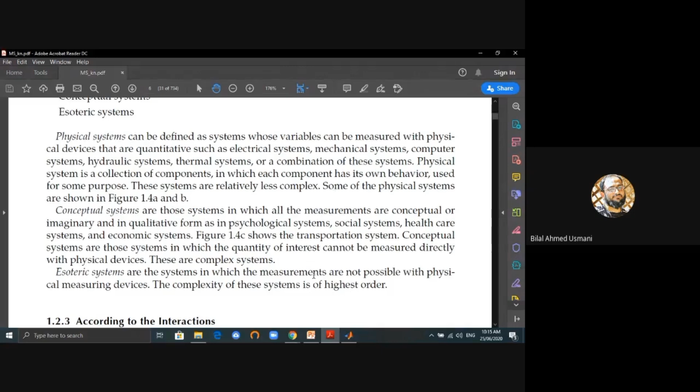So you cannot measure the mental capacity of a person. You cannot measure the thinking perspectives of a person. So these type of systems are generally esoteric, and the measurements are not possible with physical measuring devices. You don't have a perception meter or something like that to measure a person's perception related to, say, use of antibiotics. So we won't be talking about that.

According to the interaction, the systems could be thought of like that. One thing people do a lot nowadays, which is kind of the pinnacle of doing good scientific research, is that your research should be applied. Your research should be applicable to a certain domain area, and we should see the impact of your research. Your research should have the capacity to build capacity among individuals.

Your research should be scalable. Your research should be able to reproduce itself at different conditions, at different initial conditions of the system. So these types of research are quite popular nowadays. Most of HEC's funding, most international fundings, most Wellcome Trust fundings are into research which is more towards application rather than building conceptual or notional areas of science and knowledge.

So esoteric systems are over here. Electrical systems are mostly towards design. Electrical, mechanical, thermal and hydraulic systems are towards design and control. Chemical systems mostly deal with control. Biological systems, socio-economic systems, conceptual systems, psycho-based systems - for all of these, design is the most concrete physical thing, and speculation is the most towards the notional or philosophical thing. So these are the differences between them.

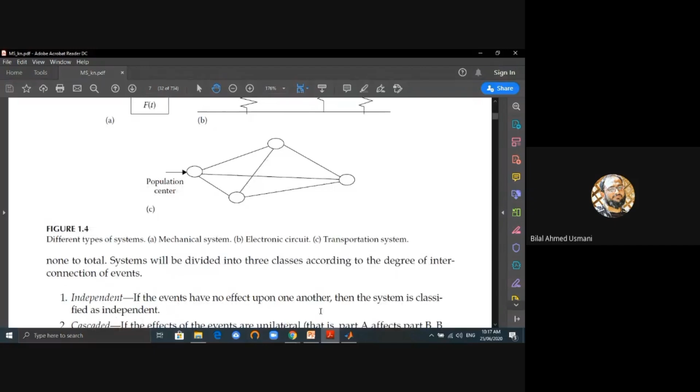Now, these are a couple of examples. This is the example of a mass attached to a spring with a damper, and this is B, an electronic circuit, and C is a transport system. You can have... I won't look into that.

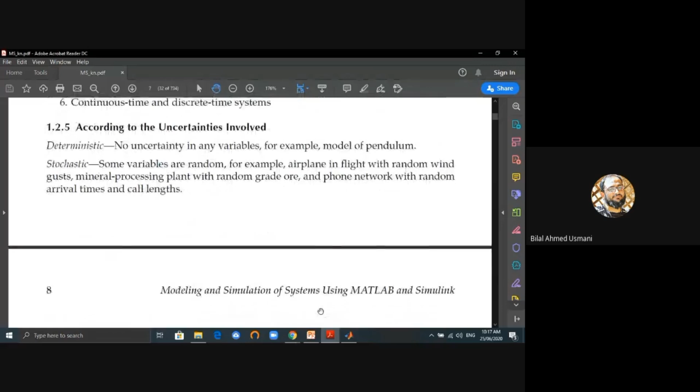We talked quite a lot about deterministic systems. We talked a lot about stochastic systems in the previous lecture. Some of them are fuzzy systems. We won't go into much detail.

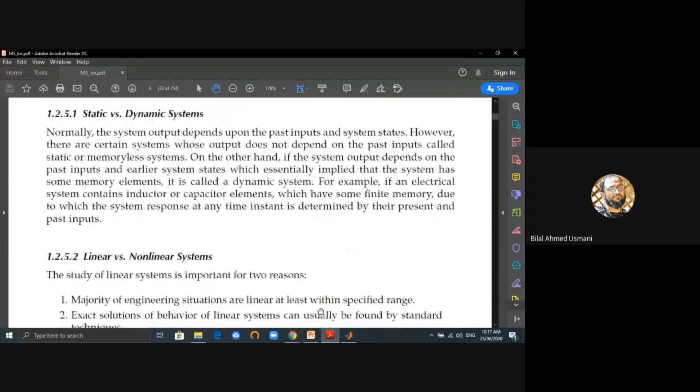So we will just look into static versus dynamic systems. The system output depends upon the past inputs and system states. However, there are certain systems whose output does not depend upon the past inputs - we call these memory-less systems. Static systems are generally, by definition, memory-less, because time has no significant contribution towards the current state, the past state, or any connection between them. So these types of processes are called memory-less processes.

For example, for today's stock exchange rates, the previous day's closing index and the trend for a couple of weeks is quite important. So this can't be thought of as a memory-less process. But if a rock is lying on a floor, and you want to see the equilibrium, the sum of forces acting at any point on that rock, you don't need to really investigate what was happening to that rock 10 or 15 minutes earlier if you're looking at its current state. So these types of systems are memory-less.

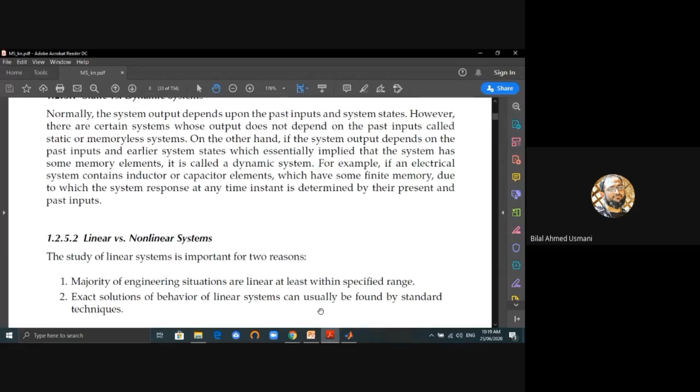However, if time is something which is dependent, then these types of systems are called dynamic systems. Now, linear versus non-linear systems: remember, we usually look at linear systems, or if we are looking at a non-linear system, we look at a very small fraction of it, in which the non-linear system could be assumed as behaving like linear. So no matter the diameter and radius of a circle, if you take a very small arc from that circle, if it is significantly small, that arc would look like a straight line.

Exact solution of behavior of linear systems can usually be found by using standard techniques. So we usually look at linear systems. All of control systems theory looks at systems which are basically linear in nature. So we can approximate the output, we can approximate the major parameters, quite well if the system is linear. If the system is non-linear, we can't predict anything.

So 1 plus 1 is always 2 in a linear system, but 1 plus 1 can be anything if we are looking at a non-linear system. So analysis of non-linear systems is very very difficult. We usually use stochastic techniques for that, or higher level complexities are involved.

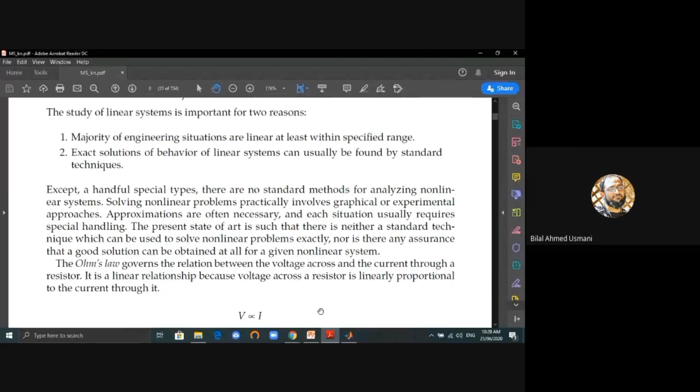Now, an example of that - that's why it's written over here. Except a handful of special types, there are no standard methods for analyzing nonlinear systems. So solving nonlinear problems practically involves graphical or experimental approaches. Let's look into a very famous linear problem.

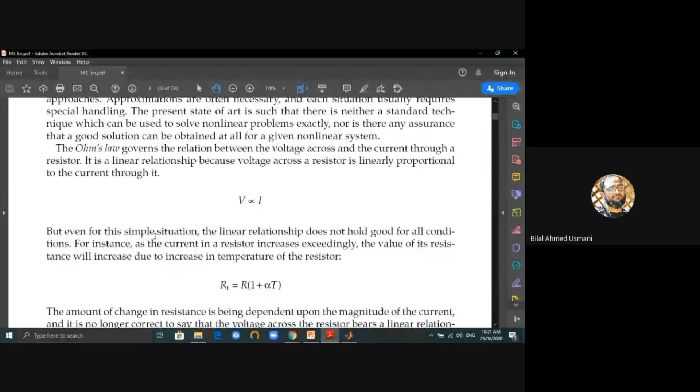This is called Ohm's law. It's a linear relationship where voltage across a resistor is linearly proportional to the current flowing through it. But even for this simple situation, the linear relationship does not hold good for all conditions.

For instance, as the current in a resistor increases exceedingly, the value of resistance will increase due to increase in temperature of the resistor. So there is one thing we didn't consider in Ohm's law, because usually in those types of laws, like thermodynamics laws, there's a caveat statement that provided temperature and pressure are kept constant, or temperature and resistance are kept constant.

So they work in a certain range. Ohm's law would work really well in a certain range, which is called the linear range. Why are temperature and pressure kept constant? Because if temperature exceeds the linear behavior of the system, the system won't be in the linear range then. So the system would transfer into the non-linear range, and if the system shifts from linear range to non-linear range, the problem is we cannot predict the output.

So that's the problem. Total resistance R(T) equals resistance times one plus alpha times T. So what is alpha? The amount of change in resistance is dependent on the magnitude of the current, and it's no longer correct to say that the voltage across the resistor bears a linear relation to the current. Otherwise R(T) should be equal to R. So there is alpha times T - alpha being the magnitude of change, and T is the temperature, which is actually changing the total resistance.

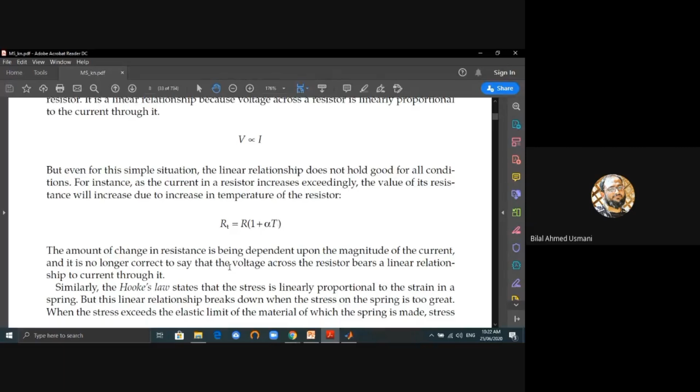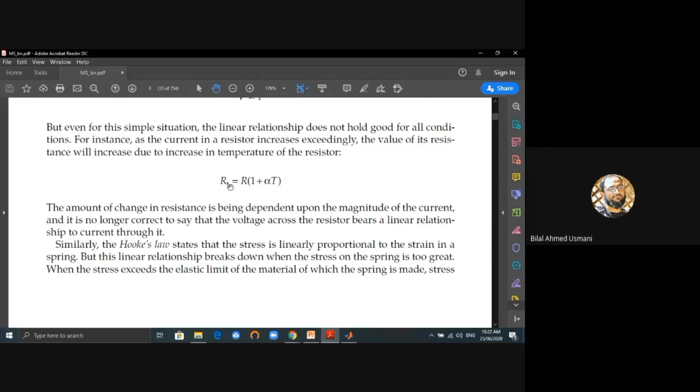So this could be thought of as the non-linear component. If the temperature effect is almost negligible, then R(T) would become equal to R in this equation, which is quite straightforward to interpret. So as far as R(T) equals R, Ohm's law would hold, because resistance is also behaving linearly.

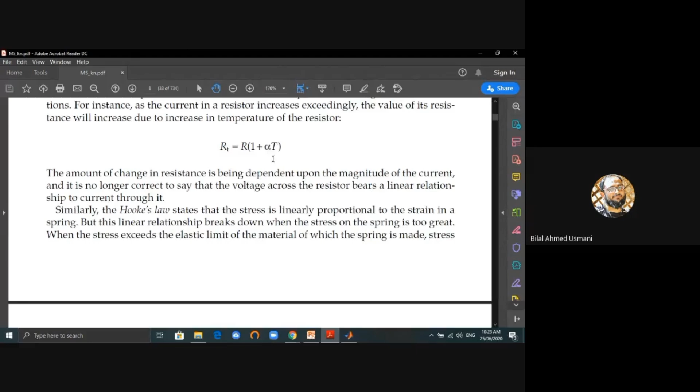Now coming back to another very famous example, which is stress is directly proportional to strain. So there is always a restriction in which there is a saturation, there is always a breakdown or material changes with ultimate set in, and they can always destroy linearity.

So another example could be thought of - if you remember Hooke's law, the classical Hooke's law says stress is directly proportional to strain in the linear region. So there are three types of regions. There is the elastic region - in the elastic region, stress is directly proportional to strain. There is another region called the plastic region, after which there is a permanent deformity in the material.

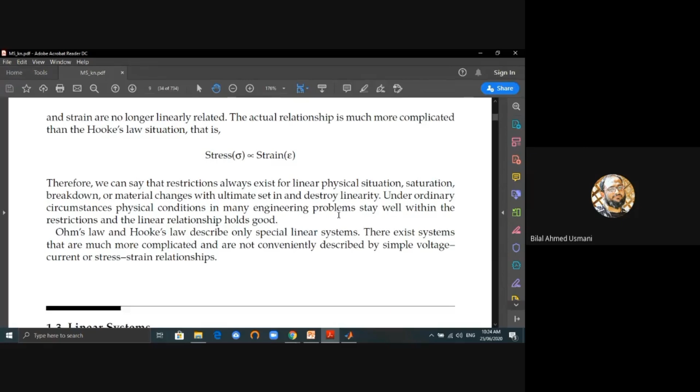Say in a spring, there is permanent deformity. So in that case, Hooke's law won't hold. And after that, there is a breaking point. So the material of the spring would break, and the fundamental background of Hooke's law doesn't exist at that point. So these are special cases in linear systems.

One more thing to look into for linear systems is the superposition theorem. Always remember that if a function - say we call it an excitation function e1 of t, meaning it's dependent upon time - there is a response function omega 1 of t, and they are directly proportional. So somehow the excitation function e1 produces a response function omega 1, and both are dependent upon time.

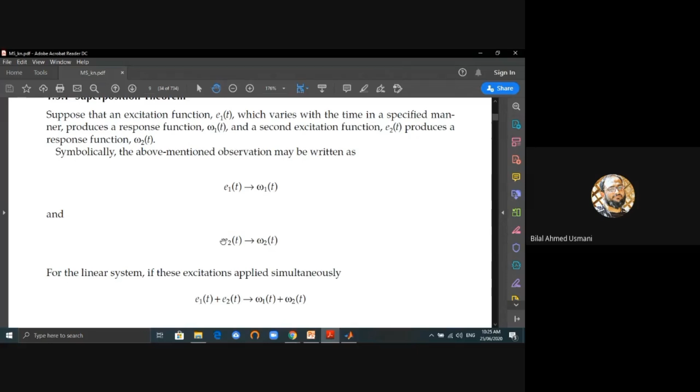And there is another excitation function e2, which is producing another response function omega 2.

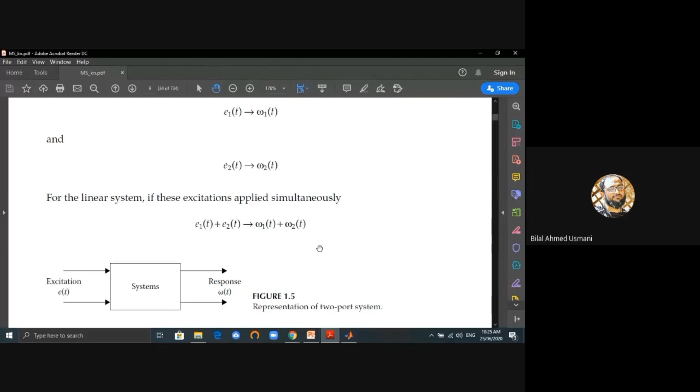The principle of superposition shows that if we sum the excitation functions on the left hand side, we would get the sum of the response functions. This happens in a linear system. So if there are two types of excitations, we can always transform it into a single part of the system.

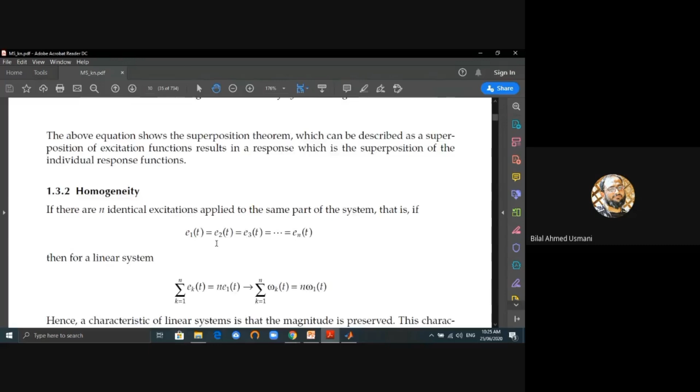There is one more property of the linear system which is called homogeneity. What homogeneity says is that if there are n identical excitations applied to the same system, then rather than summing e1, e2, e3, we would only write n times e1.

So the sum would be the total number of, say for example, there are three products which are of the same price: 3,000 rupees for product 1, 3,000 rupees for product 2, and 3,000 rupees for product 3. So what I can do is always write 3 times any product, and that would be the total cost if I need to, so that would be 9,000.

The similar thing happens, that the sum from k equal to 1 to n of ek is equal to n times e1. That's actually the total excitation that would lead to the total response: n e1 leads to n omega 1.

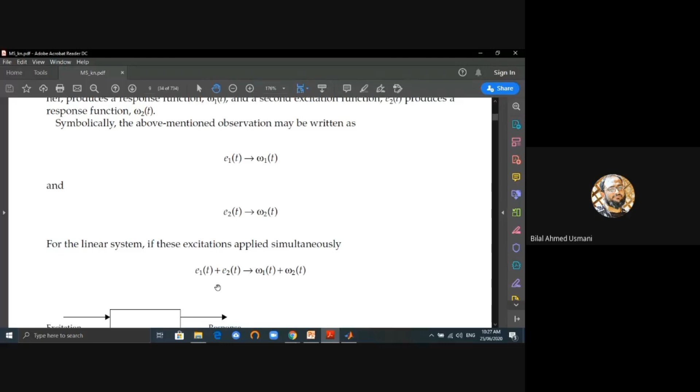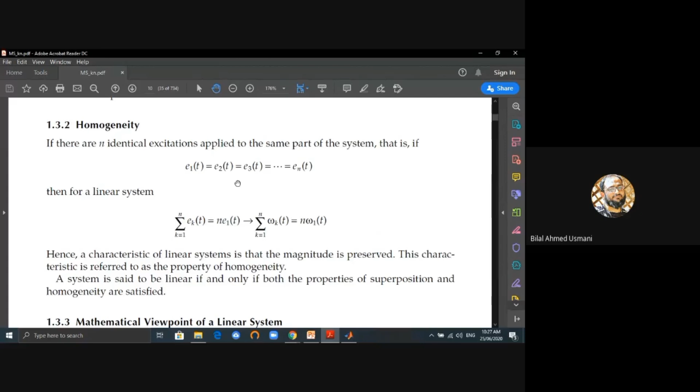Similarly, e1 plus e2 gives omega 1 plus omega 2. If there are 100 excitations e1, e2, e3 up to e100, and they all are of the same magnitude, I can always write 100e equals 100 omega, so 100 is n over here. It doesn't matter whether we write e1 or e2 or e, since they're all the same, similarly all omega would be the same. This is the characteristic of the linear system called homogeneity.

Let's have a look at it again if you didn't understand that. Okay, there is one more thing I would like

to revise, which is the differential equation. This is a linear differential equation, a very famous one, of second order. Omega is the response function, e is the excitation function on the right hand side, and t is the time independent variable in this example.

This equation has a very simple solution. You can always look at higher order differential equations, or you can look at the linear differential equation. Why is it linear? Because it's always linear in omega - you won't see any square, cube, inverse, or square root of omega. That's why it's linear in the dependent variable, and that's why it's called a linear differential equation.

The solution technique - I won't go into much detail about solution techniques. In the next lecture we might talk a bit about that, but I'm not personally interested in the solution techniques, whether you are very good at solving it by hand. If you are, that would be an additional advantage. Otherwise I'll give you a quick recap.

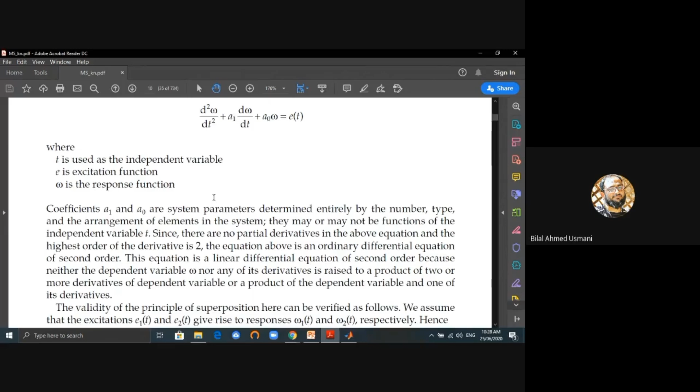Now similarly there are two systems: for the first equation, the excitation is E1 and the response is omega 1, and for the second they are E2 and omega 2 respectively. So if we add these two equations, we apply the principle of superposition.

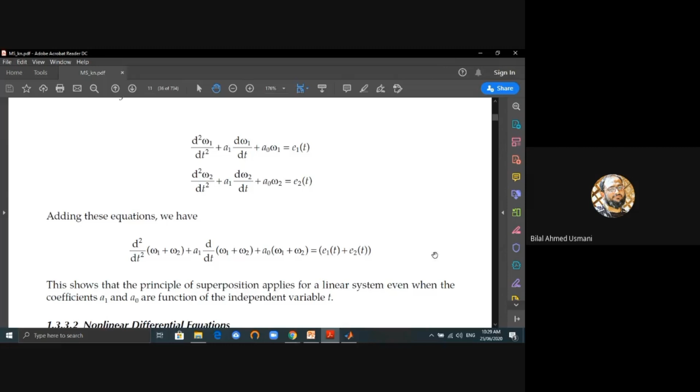There are time varying versus time invariant systems. Time varying systems are those in which time acts as a significant variable for the dynamics of the system. For a time invariant system, no matter the dynamics of the system, time has nothing to do with that.

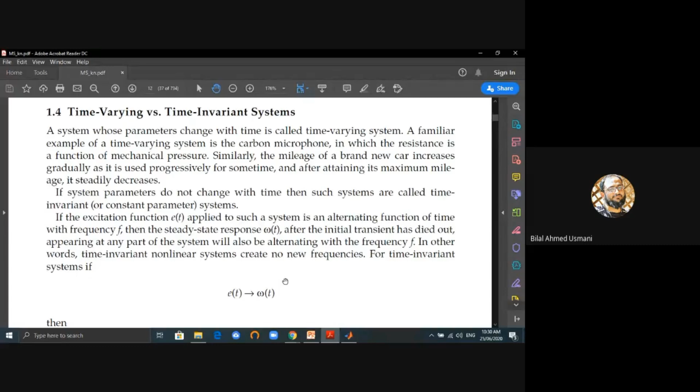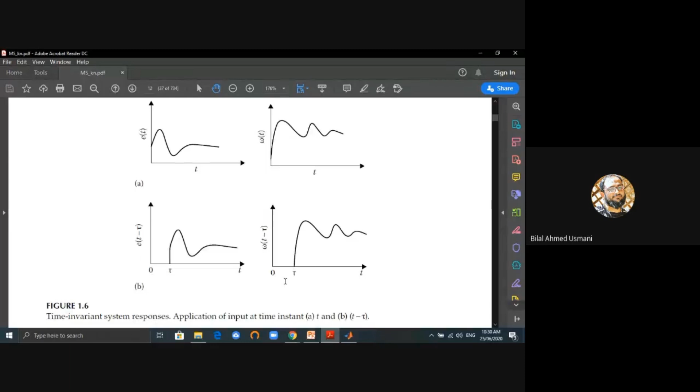We would just look into the examples. It says that a time invariant system's response to an application of input at time instant t and at t minus tau is the same. So if we apply the input over here at time t equal to 0, the output is something like that.

But if we apply the input after some time delay, at t minus tau, the profile is exactly the same and the output is exactly the same as well. So time has nothing to do with it. In fact, even if we introduce a delay of tau seconds, tau minutes, or tau hours, whatever tau is, the response of the system is almost exactly the same. These types of system responses are called time invariant.

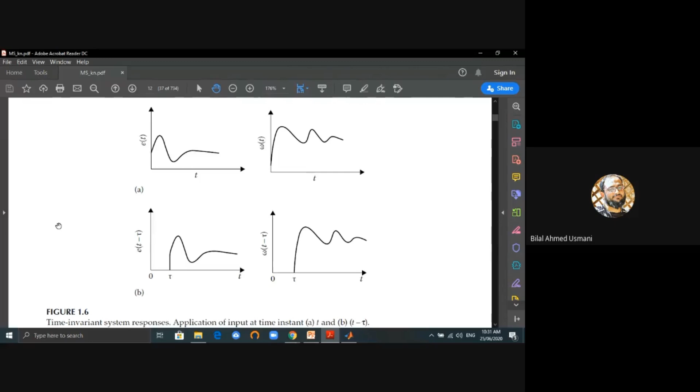So it's written here: E of t equals omega of t, and E of t minus tau equals omega of t minus tau, where tau is an arbitrary delay. I didn't explicitly say that before, but that's tau. So if t equals t is over here, and t equals t minus tau is over here, you can see that the correlation between input and output in figure (a), and the correlation between input and output in figure (b), is exactly the same, no matter the time delay.

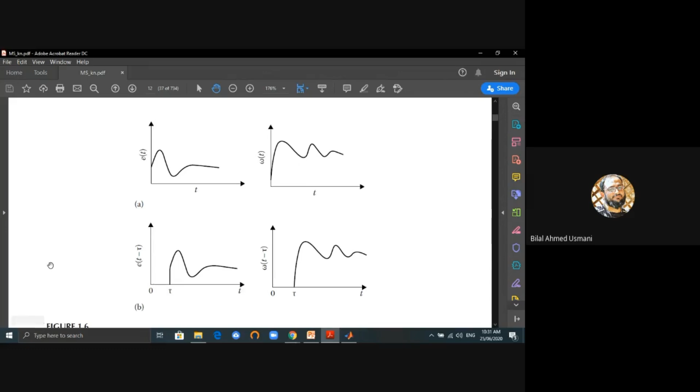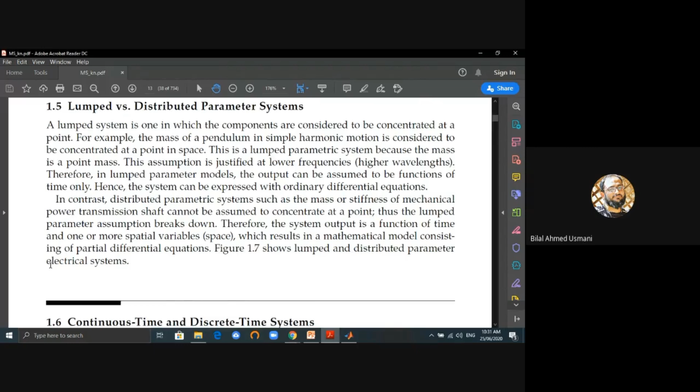So these type of systems are called time invariant system responses. Similarly, if it was time dependent, there was a certain change in the profile of the output. We won't look at the lumped things. I'm not interested in it.

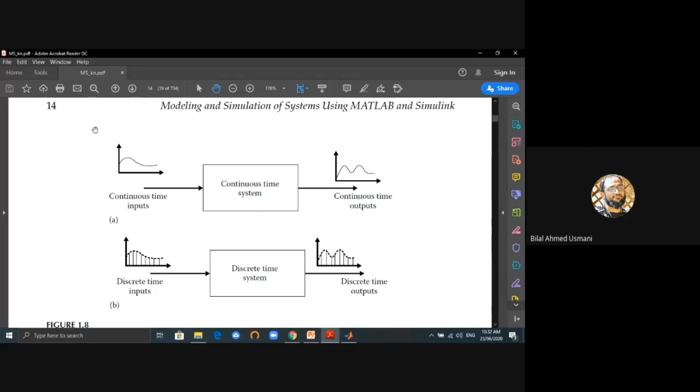Okay, one more thing is continuous time input, continuous time output, discrete time input, discrete time output. So these are called continuous time systems and discrete time systems respectively. So analog systems and digital systems. So analog to digital systems. So there we have continuous time inputs, and we can have discrete time inputs, and then there is a discrete time system, and we get discrete time outputs, and there is some converter, an analog to digital converter, and then we have continuous time output.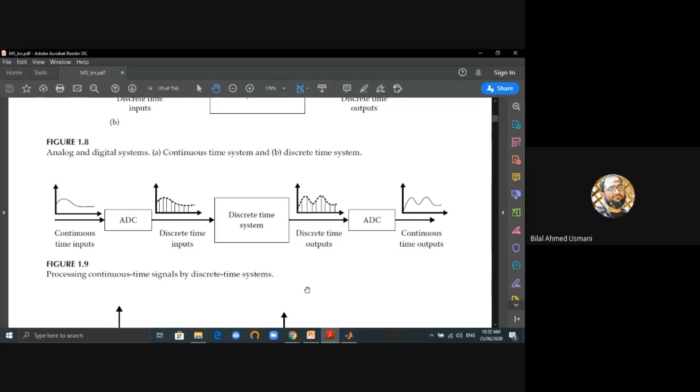So we can always do processing. If you remember the converter, what a converter does is we can change type of signals from analog to digital by using a converter. So this is a processing of a continuous, figure 1.10, different type of signals. This is analog and continuous. This is digital and continuous. This is digital and continuous, and this is analog, sorry, digital and continuous over here.

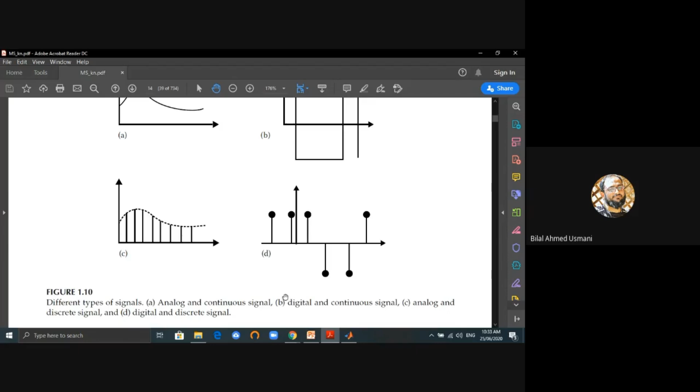C is analog and discrete, so it is analog, but it is discrete. So in terms of shape profile, a continuous signal is one in which you don't need to lift the pencil or pen while drawing the profile. For a discrete system, you need to lift the pencil or pen. So that's actually the major difference. So the fourth is digital and discrete. I would like everyone to have a look at it.

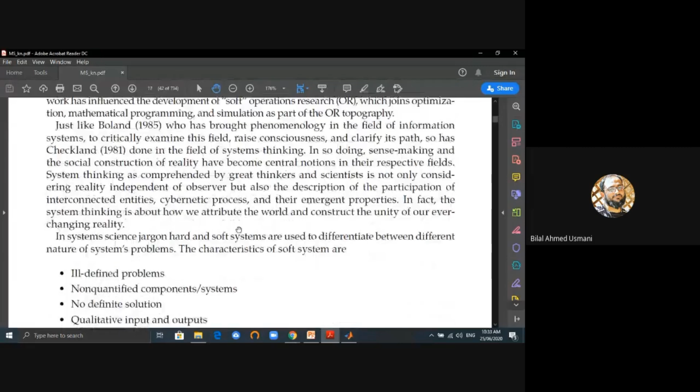Now, there are a couple of systems I would like to put some pressure on. Just an introduction. So these type of systems are called hard and soft systems. Hard systems are generally for very well defined problems, but usually problems are not very well defined. There is a certain level of ambiguity in the definition of the problem. So these type of problems are ill defined, no definite solution, qualitative inputs. It's always hard to process qualitative input into an output.

Non quantified system, so you are looking at some component which has just recently been invented, and they want you to look at the behavior. So you don't have any benchmark to compare with. So these type of systems are soft systems. So soft systems don't exclusively follow physical laws. They might have some holes in them.

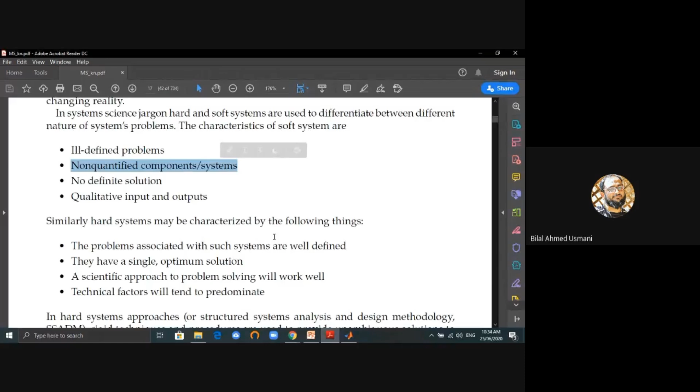Similarly, the hard systems may be characterized by the following things. The problems associated with such systems are well defined. They have a single optimum solution. A scientific approach to problem solving will work well. Technical factors will tend to predominate. So it's more towards quantitative. This is what it's saying.

Now, one more thing about the soft system is, if you try to solve it in a certain area of the world, geographic location might create an impact. Say it is sensitive to temperature. So if you work in different parts of the world, you might get different results. But for a hard system, you will always get the single optimum solution, and a scientific approach to the problem solving will work very, very well in those cases.

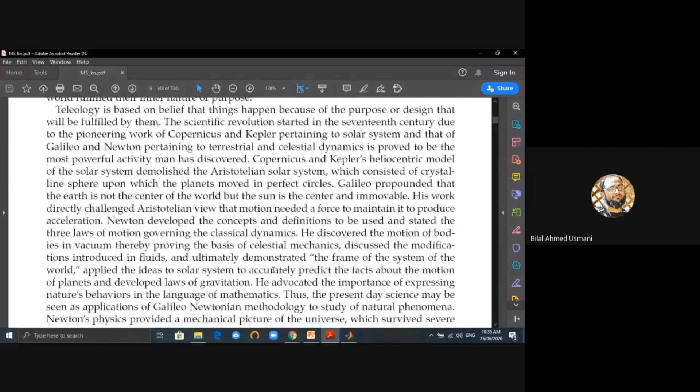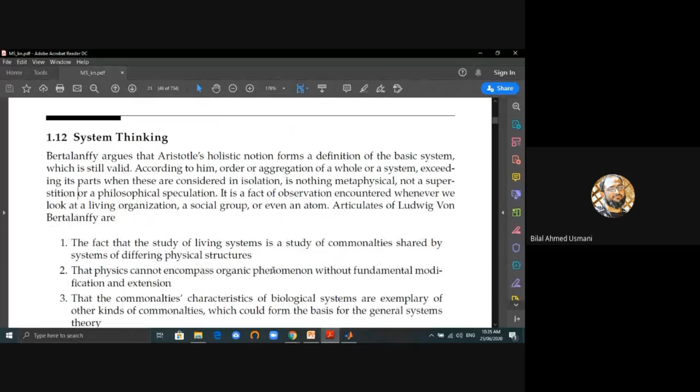Now, the good thing about this book is it has a lot of philosophy involved, which is actually very good for you. You can see the previous concepts of repeatability, refutation and reductionism. I studied them in methods of proof and the philosophical part of the courses I did in my undergraduate.

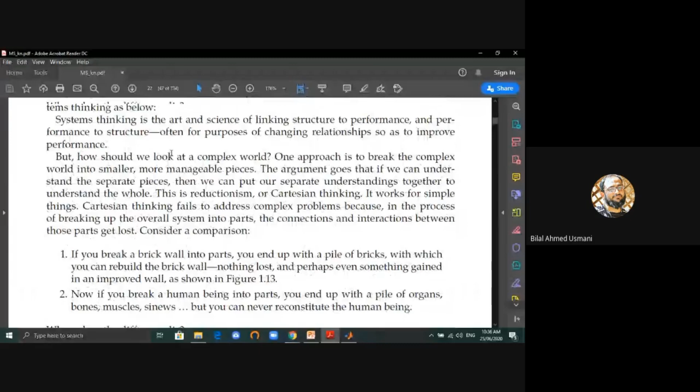Okay, that's all for chapter number one. I don't think I need to put much stress on chapter number one. Now move to chapter number two. Okay, why modeling? I have answered that. Need for system modeling. There are a couple of things.

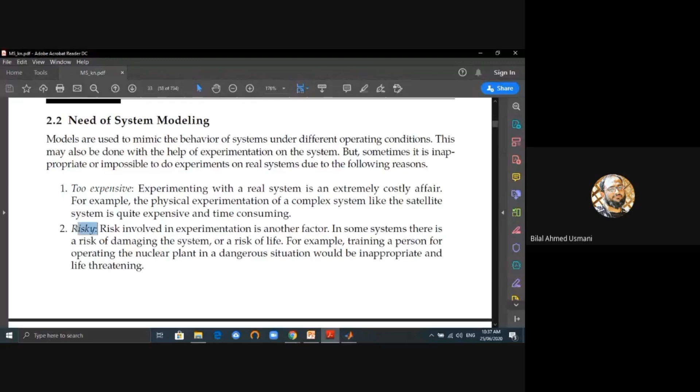Models are used to mimic the behavior of a system under different operating conditions. This may also be done with the help of experimentation on the system. The systems are usually too expensive. There is a lot of risk involved in experimentation. You cannot look at the abstract specification without doing simulation. Modeling forces us to think clearly before making a physical model.

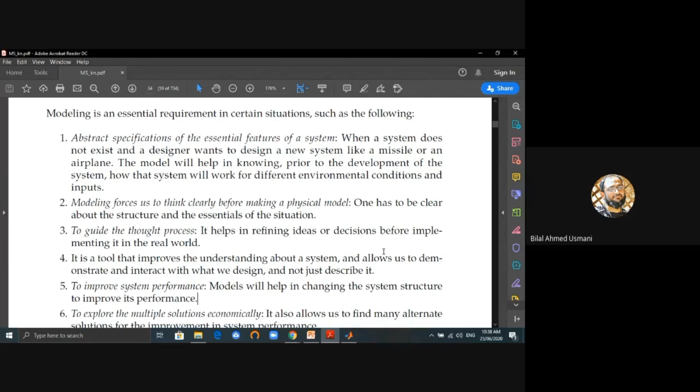There are a couple of modeling design failures which are usually stopped in the simulation process before putting into some factory and then into an assembly line and then actually producing them. To guide the thought process, this is very important. You do things systematically by modeling to improve system performance, to explore multiple solutions.

Sometimes there is another solution to the problem which is quite simple. For example, there is a very famous example in Japan. There was a packaging machine that put soaps into their boxes, and because it's an assembly line, we might have faults.

So one of the soap packages didn't get the soap. So this error was thoroughly investigated, and then what they did is that they installed an infrared camera or something, I don't know, that actually looks into the process 24/7. And if there is any problem in the process, it halts the system, and then an engineer will go and investigate what's the problem. So these types of problems are solved like that.

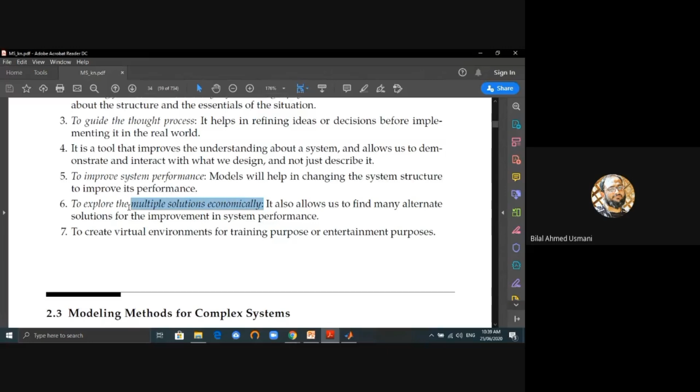But there is a simple solution in Pakistan's factory. The same problem occurred, and what they did is they put a pedestal fan near the assembly line. So if the box was empty, it doesn't contain soap, it would just fly away from the assembly line by the wind pressure. So the wind pressure would guide it away from the assembly line. So that's one more solution. So we can always think of different, economical solutions while using modeling.

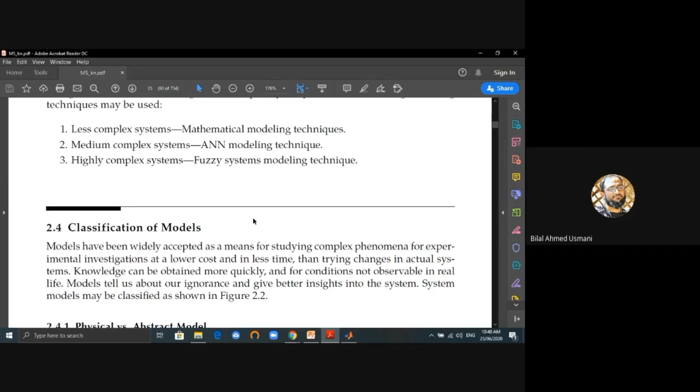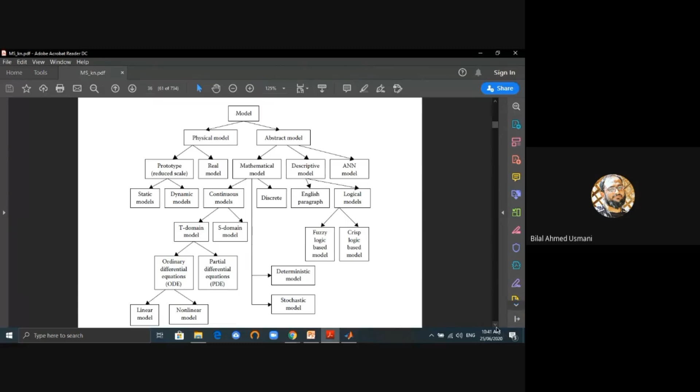Now, one more thing is this diagram. So a model can be physical or abstract, and then there are certain divisions. For abstract models, we usually go for fuzzy logic, crisp logic, ANN. For mathematical models, if you see the arrows coming downwards, it's deterministic and stochastic. There are continuous models, S domain, T domain, and usually time domain. You have ordinary differential equation solvers and linear and nonlinear models. We won't go into details of that. We've looked into certain aspects of this figure, but not all. Okay.

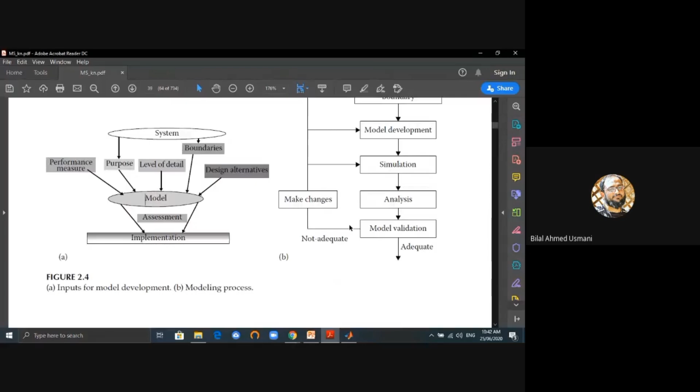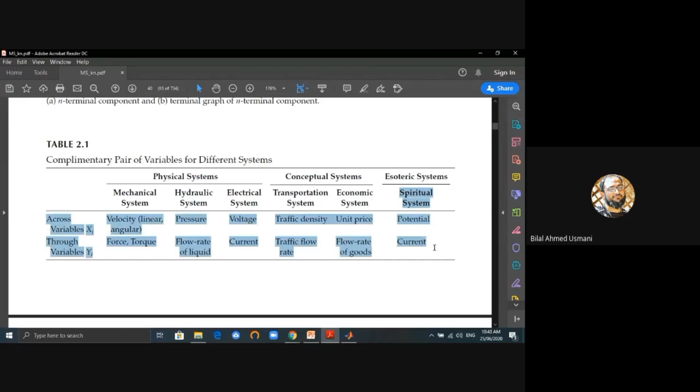Complementary pairs of variables for different systems. So there are physical systems which are basically mechanical, hydraulic, and electrical. There are conceptual systems which are basically transportation systems and economic systems. There are esoteric systems which are spiritual systems. We won't look at them. So what are the across variables? Xi, which are velocity, linear velocity, angular velocity. In hydraulic systems, we look at the pressure, and so these are the x variables, or the independent variables.

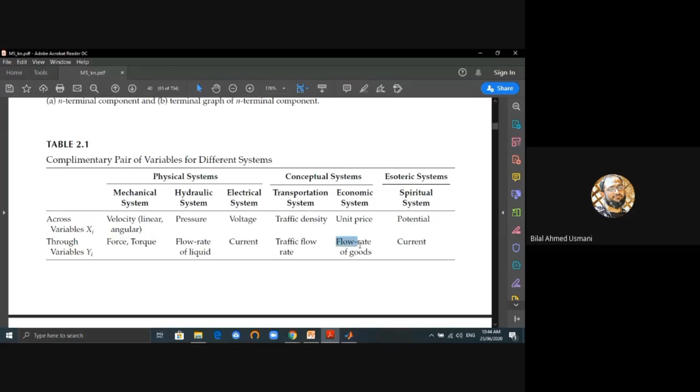We looked at voltage, because voltage is always applied and current always flows. So voltage is always on the x-axis and current is always on the y-axis. The traffic density can be thought of as an x variable, which will be used to determine the output, which is traffic flow rate. Unit price can be thought of as the independent variable or x variable, and that can be used to determine the flow rate of goods. And similarly for velocity and force. So these are some examples.

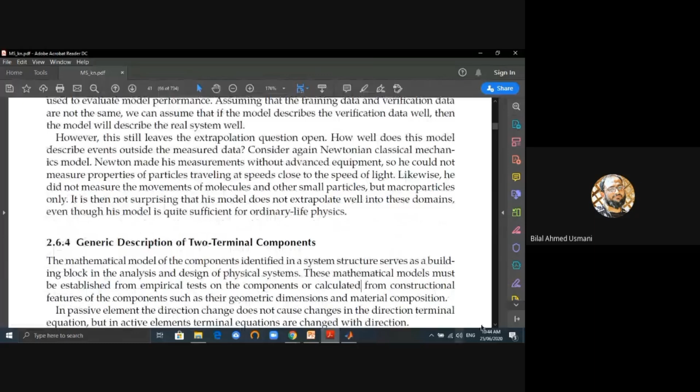This is something I would like you to pay attention to. So there are some types of elements which are called A type elements. A type elements are dissipator or algebraic components. B type elements are delay type components. C type elements are accumulator or capacitive type components, and D type elements are drivers or sources, as shown in table 2.2. We'll go to table 2.2 in a minute.

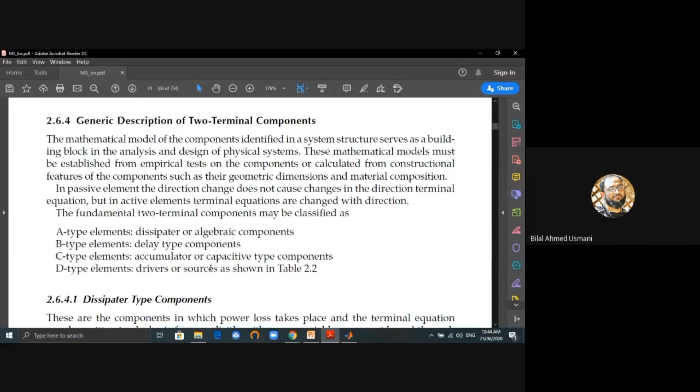Now, if you remember the electrical system, it is always RLC. So in electrical engineering, we look at RLC circuits: resistor, inductor, and capacitor. In mechanical systems, we look at damper, spring, and mass generally. So the dissipator type is the resistor that actually dissipates the energy, or loses some of the energy or some of the input power.

And delay type are actually spring, inductor, torsional spring, internal delay component in hydraulic. So for example, for a spring of a car, if you pass through a really rough terrain, then it would dampen the effect. So immediately you get a jerk in your vehicle, or there is a speed breaker. Sorry, the damper actually dampens it, and a spring basically puts a delay to the effect. A very small fraction of time, but it produces a delay.

There is something called accumulator, which actually stores the energy. So these are capacitors, mass, inertia, and then liquid tank in this example. If you're looking at hydraulic things, what are the sources or drivers? Voltage or current are source and driver in electrical circuit. Velocity or force are drivers for mechanical system. For rotary motion, angular velocity or torque.

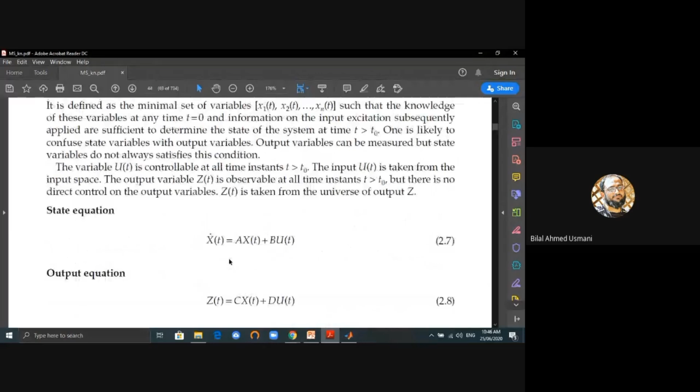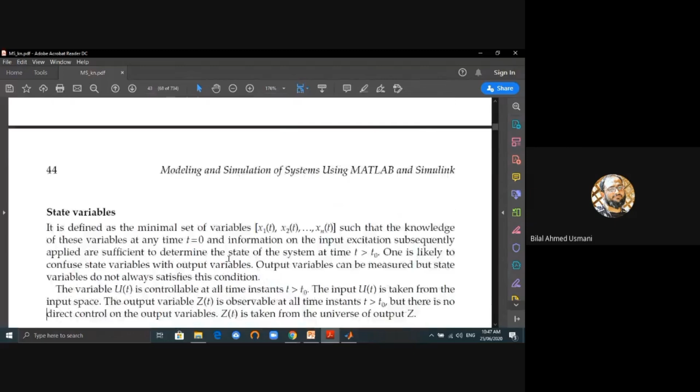Okay, 2.7, mathematical modeling of physical systems. They have introduced some concepts. So state, if you remember, we talked about state variables in greater detail during our last lecture. So state variables are very important. And if you look at the state equation, x dot means rate of change of x with respect to time, which is dependent upon A times x plus B times u.

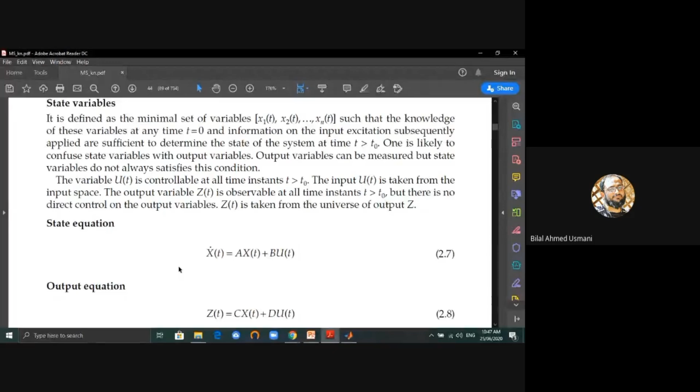I think I should talk a bit about exponential behavior of the system. So next lecture I will talk a bit about exponential behavior or exponential logistic curves. Just remind me. Okay, so output z of t is dependent upon x and it's dependent upon u. Now consider an example. This is the last topic of today. A very simple example, and how can we formulate a problem out of it?

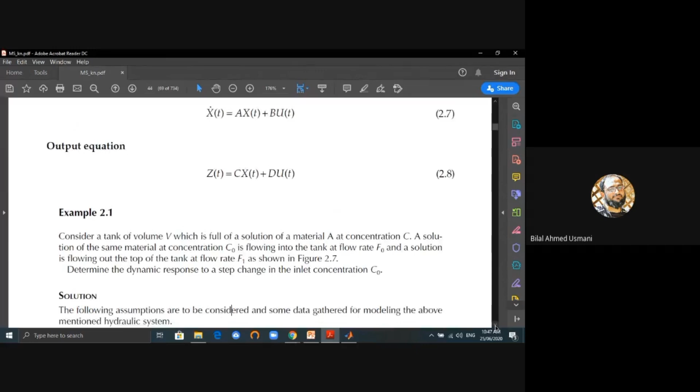So consider a tank of volume V. Now everyone pay attention, please. I want everyone to pay attention. Consider a tank of volume V. This is not just an example. We will try to learn how the problem is being built. It's not just solving a question, getting the answer and getting 10 out of 10 for that. Now we would think a bit more towards construction of the problem.

Now consider a tank of volume V which is full of a solution of a material A at concentration C. So the material A could be water, at any concentration C. And the tank capacity is V. A solution of the same material at concentration C naught is flowing into the tank at a flow rate F naught, and a solution is flowing out the top of the tank at a flow rate F1 as shown in figure 2.7. We would quickly go to figure 2.7.

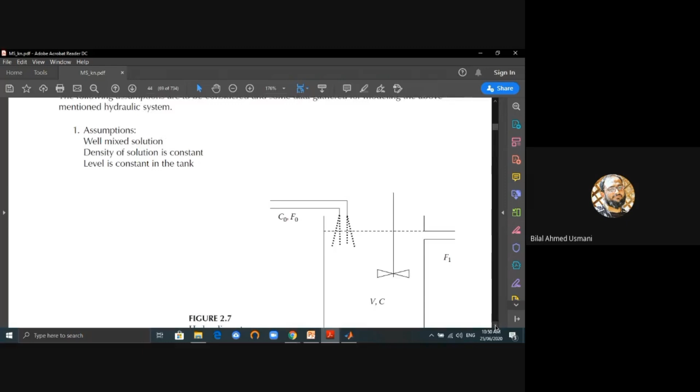So this is the volume of the tank. So the input is coming at C naught and F naught towards the tank, and the output is at F1. There are a couple of assumptions. We are assuming a well mixed solution. So the input at concentration C naught and flow rate F naught immediately gets well mixed into the solution, so that F1 contains equal parts of this liquid. The liquid is the same but with different concentrations, so they are immediately mixed and then they go to F1.

This is very important. We have a well mixed solution. We shouldn't have pockets of mixture, where this area has greater concentration of the input liquid coming from here, and this area has lesser concentration. So first thing, it's a well mixed solution. If you remember doing experiments in chemistry, you always stir the beaker to make it well mixed.

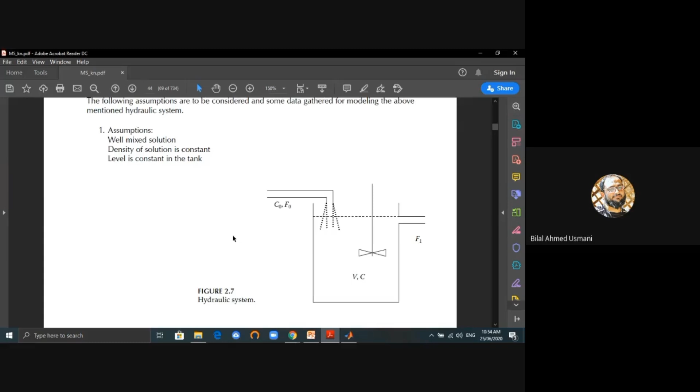The density of the solution is constant, the level is constant in the tank. So there are two more assumptions. The density being constant means it's not that this is heavier so it would sink down. The density is the same, and the level is constant. The tank is of a certain fixed geometrical shape, not an irregular shape, so that the level is constant in the tank. Now, what is the data?

They have given us some data. So the flow rate for the liquid which is coming into the container or the tank is 0.085 meter cube per minute. So for every minute passed, the flow rate is 0.085 meter cube. The volume is fixed for the tank. It is 2.1 meter cube.

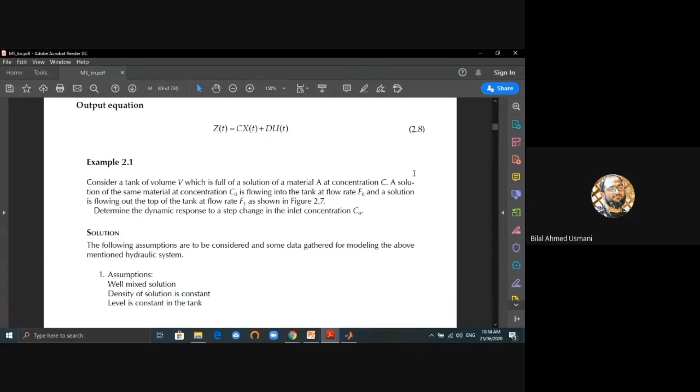So what is C int? C int is actually the initial concentration, and C naught is actually the concentration of the liquid which is flowing into the tank at flow rate F naught. So C initial concentration was 0.925 kilogram per meter cube when T was less than or equal to 0.

When we started our experiment, that was the initial concentration, and the concentration of the incoming liquid, which is coming from the overhead pipe, is 1.85 kilogram per meter cube when T is greater than 0. So this is clearly a dynamical system where time has some effect. The system is initially at a steady state, so concentration at any time T was equal to C naught of T, which is equal to C int, or initial concentration.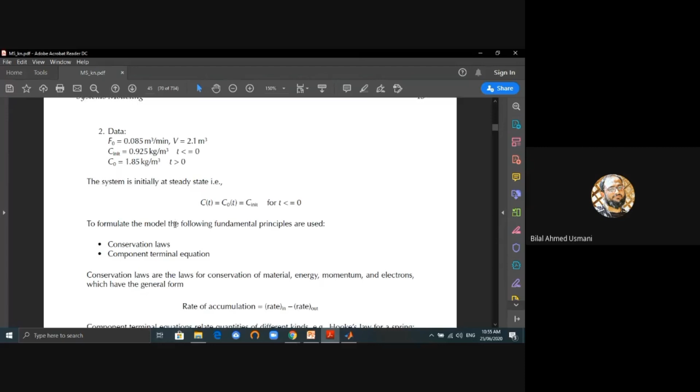So all three variables are actually the same when the system was initially at the steady state, when time was equal to 0 or less than or equal to 0. But when we started to note the time, then we need to formulate the model. When we click the stopwatch, these three variables started to become different.

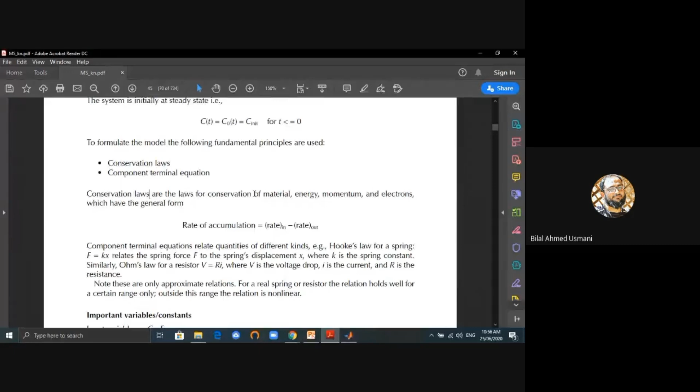Now, to formulate the model, the following fundamental principles are used. We should have information about conservation laws. We will talk about the component terminal equation in a minute. So, what are the conservation laws? They are the laws for conservation of material, energy, momentum, and electrons. Rate of accumulation is rate in minus rate out. This is the simplest of the conservation laws we can use.

So, what is the rate of accumulation of liquid in the tank? It is the rate which is incoming minus the rate which is outgoing. Component terminal equations relate quantities of different kinds. Hooke's law could be thought of as a constitutive equation, and so on and so forth. One more thing is that we assume that they are approximate relations.

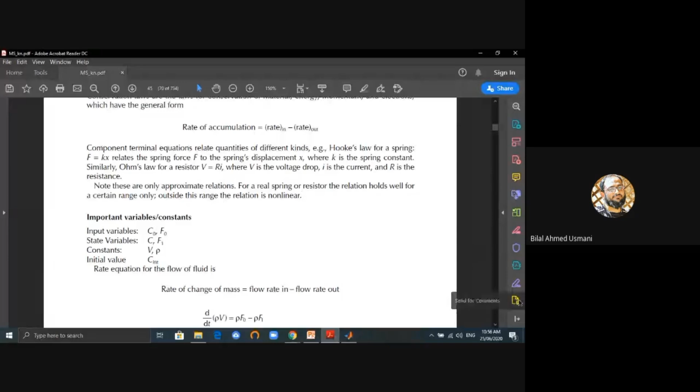For a real spring, real resistor, or a real tank, the relation holds well for a certain range only. Outside the range, the relation is non-linear. For example, temperature can really cause havoc on the system. So what are the important variables? Input variables are C naught and F naught, which are from the overhead pipe. State variables are C and F1: C is concentration and F1 is the flow rate out of the tank.

What are the constants? Tank volume is constant. It is assumed that the tank volume is always constant, so the tank doesn't change its shape during the experiment. And the last thing is rho, the density is constant. So the density of the liquid is constant, the volume of the tank is constant, and the initial value of concentration is C int. So rate of change of mass is flow rate in minus flow rate out.

So what is the rate of change of mass? If you remember, density is equal to mass over volume, so mass would be equal to density times volume. This is written on the left hand side, and rate of change means d by dt. Now rho F naught, flow rate in, is the density of the liquid times the flow rate coming inside. It has a positive sign because it is coming into the tank.

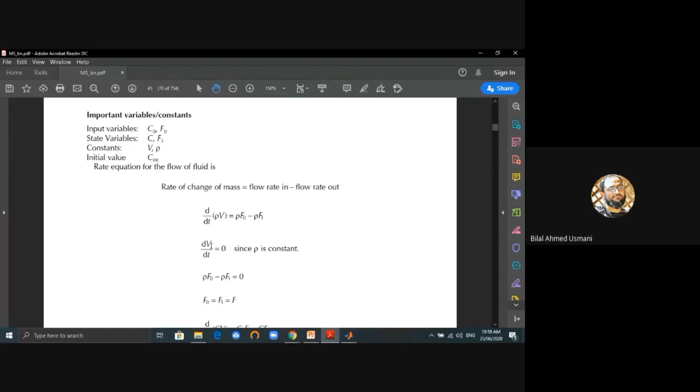We take rho outside, take rho common from here, and then cancel it. So rate of change of volume would become zero. Why would it become zero? Because volume is fixed and density is constant.

So d by dt of cv is equal to c naught f naught minus c f1. If we cancel it, that would become v d. We take volume outside. Why did we take volume outside? Because volume is constant. The same concept. So dc by dt will become, and divide by volume. So this is the differential equation.

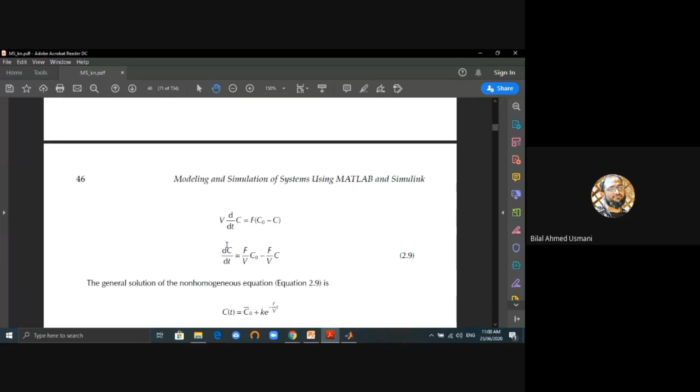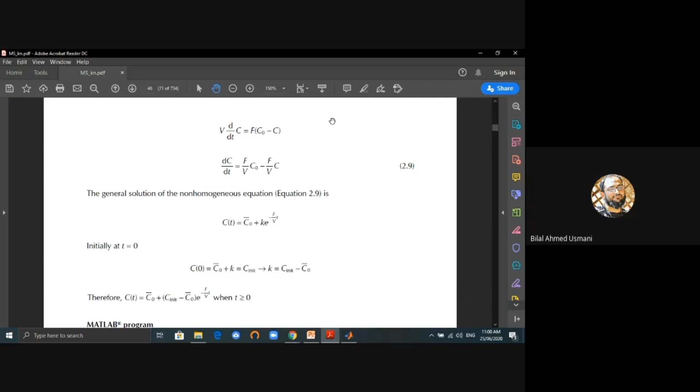This is a linear differential equation in terms of c, and actually we need to find the integrating factor for that. But I don't want any one of you to find the integrating factor right now. This is the course for first order linear ODEs, ordinary differential equations. So have a look at it. Anyways, the solution is over here. I am particularly interested in the solution, so that's why I'm zooming my screen. So this is the solution.

What does it mean? Is there anyone in the class who can just translate the solution to me? Hmm. What is this equation saying?

Okay, as expected. So the concentration of the liquid in the tank at any time t is equal to the fixed initial concentration, which is the linear part, plus k times the exponential decay part, and decay is happening with respect to time. So concentration at any time t of liquid in the tank is equal to initial concentration plus

k, any constant, doesn't matter, exponential minus f upon v. So f is rate of flow, v is volume, and t. So this is actually what's happening in the system. At any point in time, we can always find the concentration after 1 minute, after 2 minutes, after 3 minutes. What you have to do is replace t by 2, 3, 4, and get the values of f, v and c naught. You will get the answer, and k.

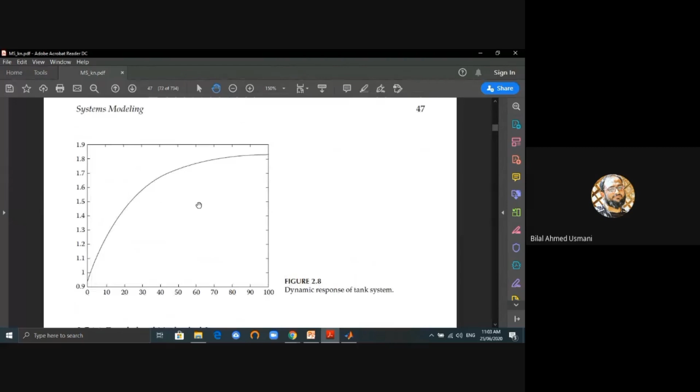Now this is the same example, and this is the figure. If you look, the x-axis is the time, and so this is the solution. So the independent variable over here is time, and the dependent variable is concentration. So on the x-axis it is time, and on the y-axis it is concentration.

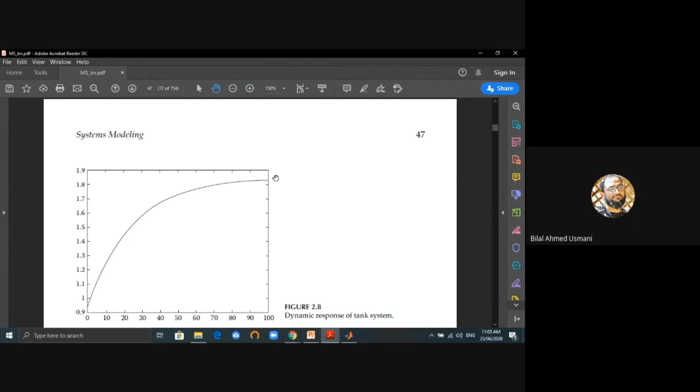So as time passes, because of the water coming from the top, the concentration starts to increase until it reaches a steady state. So after that, no matter how much liquid you add, the concentration will always remain the same. That's why it's going toward the steady state. This is the dynamic response. What we can do is always give it a try in MATLAB.

And if I run it till here, so what was the syntax error by the way? Oh, so is there anything else? Okay. Always remember whenever you copy and paste, there are certain things in MATLAB. It's actually the interpreter problem, text interpretation. So you need to give it a good look before just copy pasting and running it.

Okay, please run. So actually, what's happening over here is, run till line number 9. Just give me a second. It might not be visible to all of you. Fonts, that's too much. Okay, till line number 9, we are just initializing and nothing else.

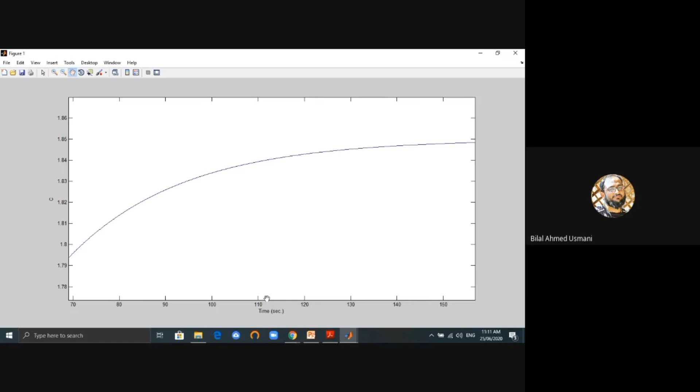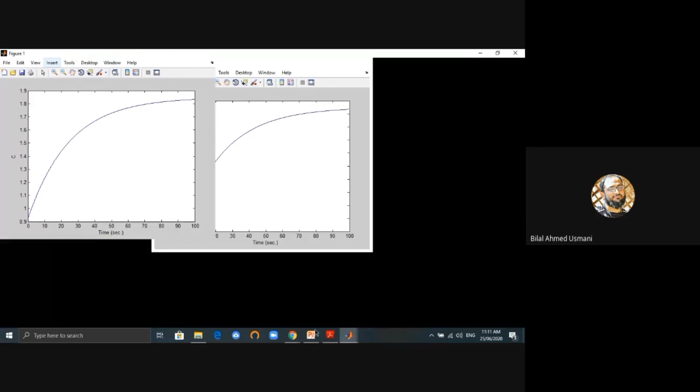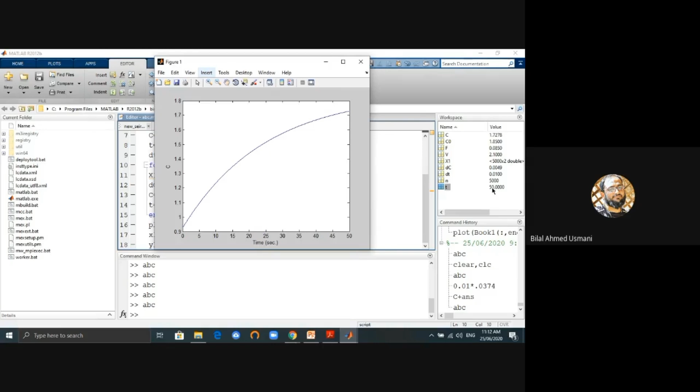I just wanted to look at 50. You can see that time is 50 now, final time. And if you look at x1, it will only run until time becomes 50. So this is the behavior of the system. The dynamical system has different behavior at different time points.

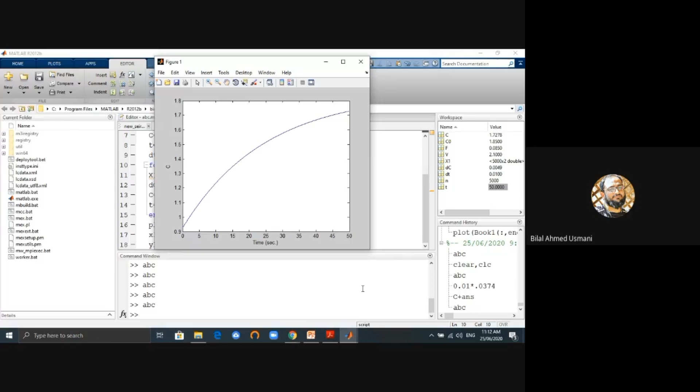And if you look, if you change the time step, I won't recommend changing the time step. If you change the number of points you want to actually integrate this differential equation, you can always get a different solution from that. So I think that's enough for today.